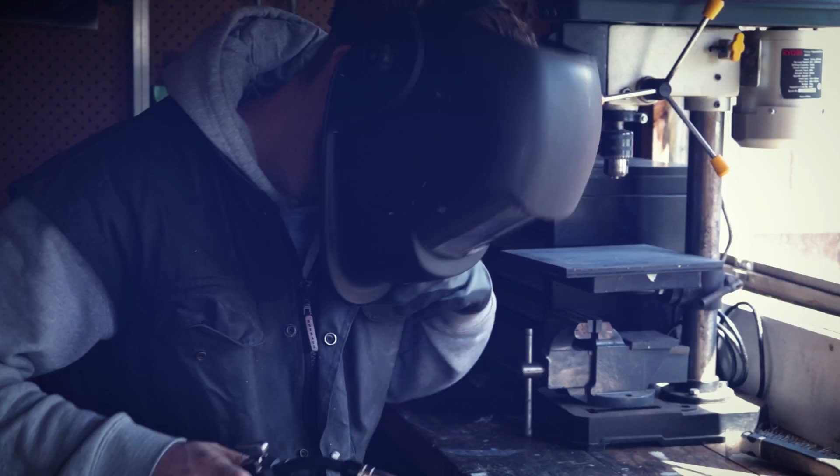Welcome to Further Fabrication. I start by defining the dimensions I want the top, and that's 1350mm long by 600 wide, and the working height's going to be 700mm off the ground. Then I can work out the dimensions of the steel legs by first defining the angle we need.

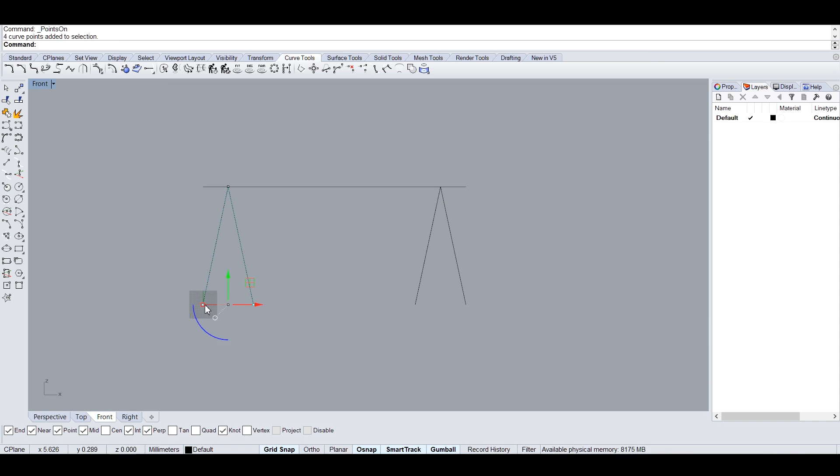Because I want the bottom of the legs to stay in line with the edge of the desk, it's a simple case of sliding the top vertex of the legs inwards until I get the angle that I like. There's no real right or wrong here, but I found around 12 degrees is kind of the Goldilocks zone. I then set the height of the bottom shelves to 100mm off the ground, and then the width is going to be defined by the angle of the legs.

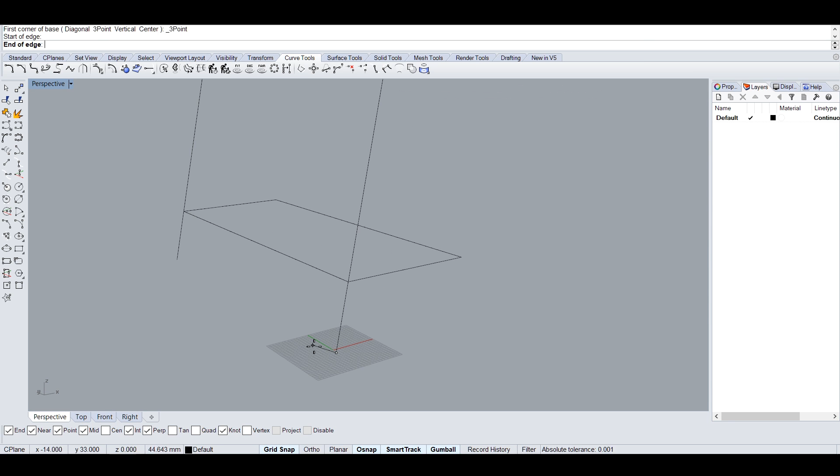I then extrude my lines out into the dimensions of my materials. I'm using 20mm SHS, that's square hollow section, mild steel, and I think my timber should be around 20mm thick once it's been surfaced. That gap I put in the top of the trestles is where the hinges are going to lie, and it's also going to serve another purpose which we'll see towards the end of the build.

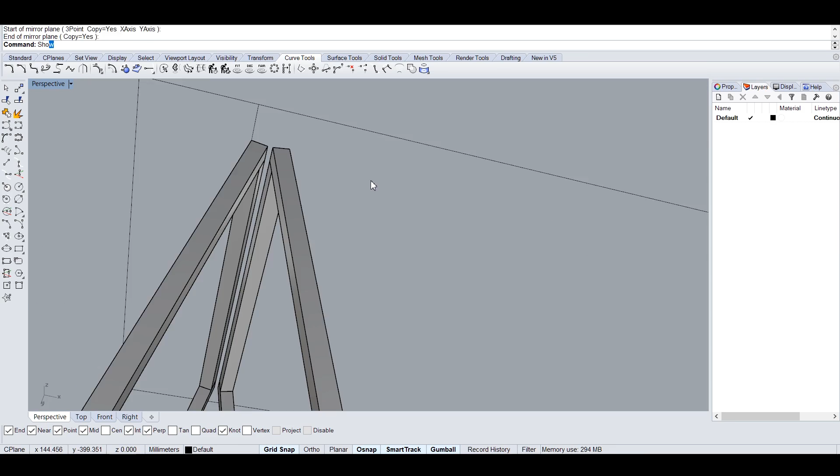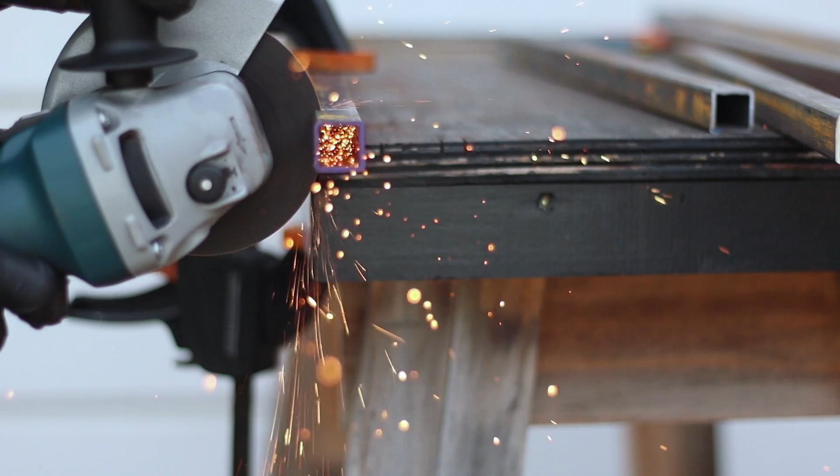Now, moving on to the build, I'm going to start by breaking down all the steel into lengths, and I'm also going to put chamfers on the edges I know are going to have welds, just so I have good penetration. I clamp my pieces into position and begin to tack weld them on both sides, and repeat that process until I've got 4 frames.

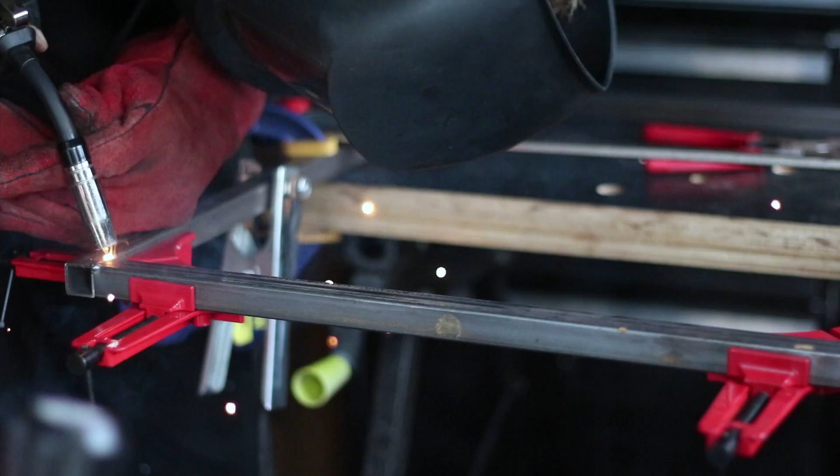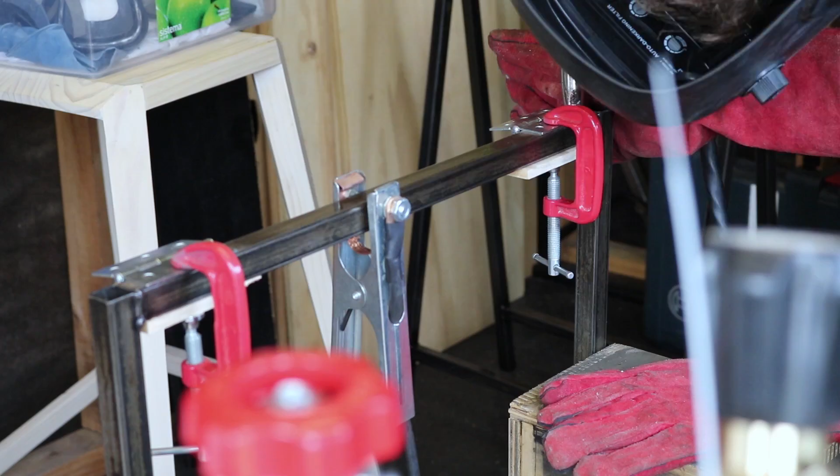For this build, I'm being very deliberate about where I place my tacks, as I want to keep all my welds visible and keep the natural mill scale patina on the steel. I then join 2 pairs of the frames together by welding hinges in the top and then grinding the welds flat with a power file.

That takes care of the steel trestles, and it's time to move over to the timber. I'm using rough sawn macrocarpa from a local sawmill and resawing it in small increments so as not to bind the blade up, as there was quite a bit of tension in the boards. I then headed over to the old wood chip maker and skip planed the boards to their final dimension.

Because I don't have a jointer, I'm trying something a bit different, and I'm using a flush trim bit on my router and a relatively straight piece of steel as a guide to square up the edges before gluing, which did seem to work okay. Next up is marking and machining the slots for the biscuits. I went with an alternating pattern to help keep the boards in check from bowing during the glue up.

Now I liberally applied glue to both sides as I wanted to compensate for any possible voids during my jointing earlier. I know you can't see me doing air quotes, but that's what I was doing there. To keep the glue up simple, I joined the boards into pairs first before then gluing them all together to the final width. I also did this process off camera for the 2 shelves that sit at the bottom of each trestle.

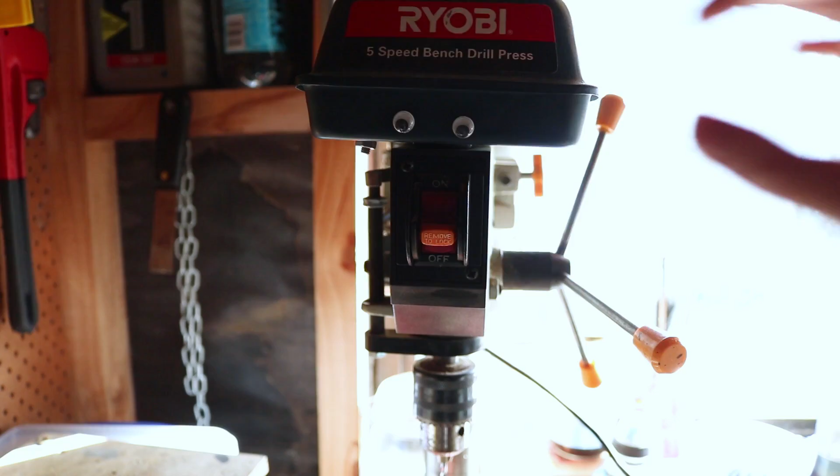I used 4 on the outside corner of each shelf, so that when the trestles extend out, they're held captive between the downward pressure of the desk and the clips. The clips on the underside of the desk work a bit more simply. They slot into the gap in the top of each trestle that we created earlier when I placed in the hinges, like this.

And those screws that I put in just before, they're sitting in elongated holes so that they can move laterally when seasonal wood movement occurs. Now with that all done, I think we can call this finished.

I know this is a big call, but I think desks might be my favorite piece of furniture to build. They're like a sculpture in pure functionality. Nobody owns a desk to go fast or have fun. The only reason you have a desk is to get work done.